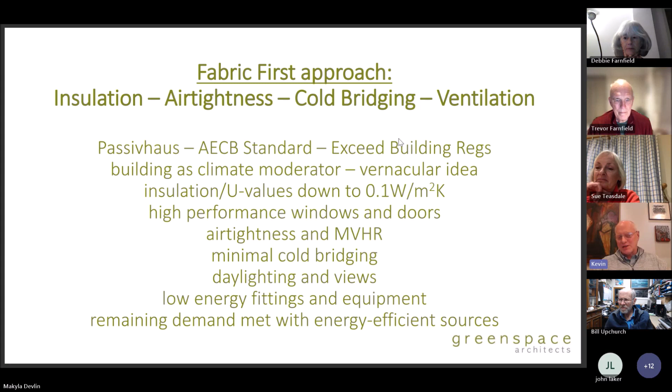Next, please. So with new build, it is a bit easier. You can use these on extensions as well, but if you are thinking about a new home, this goes quite a long way beyond the building regs, but there are basically 2 choices: timber-based systems or concrete-based systems.

The timber systems include what are called SIPS panels, which are structural insulated panels, which are 2 sheets of board with insulation between. The passive frame is taking 2 bits of timber and filling the gap, usually with cellulose fibre, which is like ripped up newspapers, if you like, a very, very low carbon, very high performance solution, or what are called closed panel timber frames. So you may have seen timber frames made out of 4x2, 5x2 sections. These are actually made in a factory and come to site as whole wall panels. You get a much higher standard by building off site.

On the concrete side, it's called insulated concrete formwork. If you watch Grand Designs, you may have seen polystyrene blocks that they fill with concrete and sometimes they burst. So products like Nudura or Jack-On. Then there are the mineralized wood fibre ones. You may have heard of Durisol, for instance, which is a bit like shredded wheat, if you like, strips of timber covered in concrete and formed into blocks, which again you pour concrete inside, and there is a panel-based version of that.

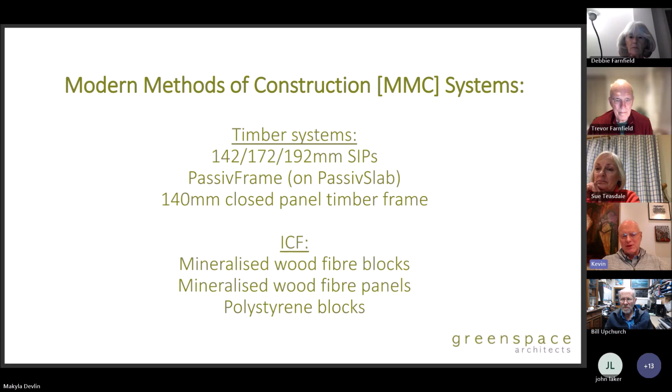Next, please. And with those, there is no real look to eco design. If you wanted it to look like a Georgian cottage, you could do that. If you wanted it to look like a farm, you could do that. If you want it to look like the grand design you wished for, it could look like that. Some people want to be demonstrably green, so people know they have an eco house, but one of the most eco houses we've got does look like a Georgian farmhouse. This is the one that has no space heating demand, although he has put this small LPG boiler in.

A company called MBC, based in Gloucester, produced this twin frame, which has already got passive house standard. Now, passive house is one of the standards, again, you may have heard of. There is a retrofit version called EnerPHit, and this really takes everything, airtightness and insulation, as far as you need to in order to have that warm jacket. And the idea of the warm jacket actually keeps the heat out in the summer as well as keeping the heat in during the winter. Works both ways.

And this one, in the top centre with the pink there, actually has a polystyrene ground floor slab as well. The pink or purple part is higher density polystyrene, which means there's no cold bridge to the ground even, and then a minimum amount of concrete. The hatched area in the centre is a small amount of concrete. Concrete, unfortunately, is still the only thing that really does what it does. You might hear of hempcrete and other concrete substitutes, but they're still a little way off being mainstream yet, while they are trying to decarbonise it. So with new build, relatively easy.

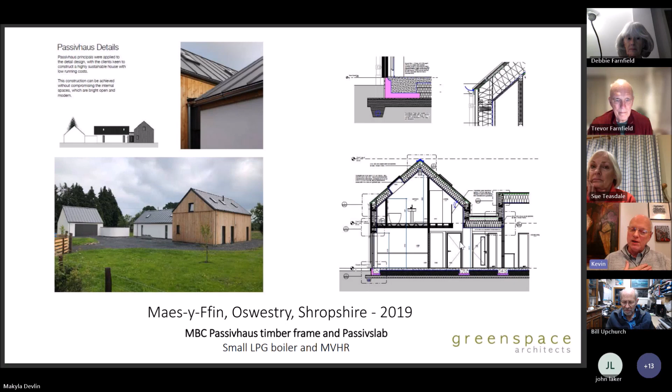Next, please, Michaela. This is an ICF house, again, completely different shape, completely different look. This is made up of mineralized wood fiber panels, but it's got a huge integrated solar array, big battery, and an air source heat pump. And it could look like what. So part of it has got timber frame in it, brickwork and slated roofs. The rest has got a sort of standing seam metal, which is reflective of a barn across the river, the other side, that it's kind of inspired by, and the materials kind of update that.

But as you can see, the as-built EPC, when it was completed a few months ago, has actually gone beyond. EPCs go from 0 to 100. Anything above that means you're a net exporter of energy. So not only are they energy efficient, they're actually positive contributions back to the grid, meaning it creates more energy. So again, new build, relatively easy. It's not rocket science. This is the thing. So next, please.

This is just a section through the level of detail you have to go to, and you've got to have effectively an airtightness champion, because airtightness is about as important as insulation: you stop the draft, you stop the leakage in and out. You can't quite see it on here, but there's a line that runs all the way around the outside, around to the windows and everything. And somebody on site has to make sure that is maintained.

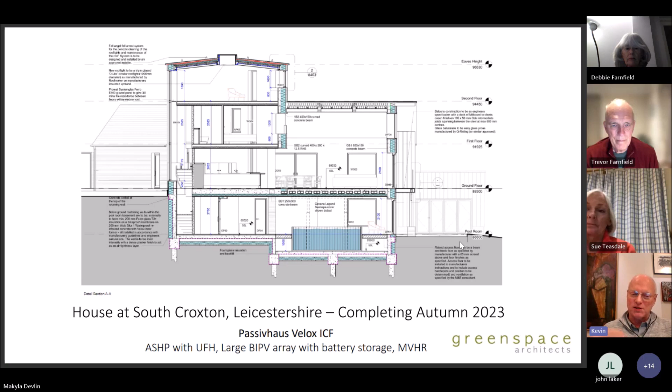So you've got this breathable layer. It's not like living in a plastic bag; moisture can pass through it, so the walls breathe. But you then have to meet that with a mechanical ventilation system, which recovers the heat before it leaves the building. Next, please.

So here, this is a 1956 bungalow that actually backs onto Highgate Cemetery. One of the Monty Python cast lived next door. Very interesting. In fact, the lady's father designed it, and she grew up there. And we've done effectively the basic thing. We're trying to get that warm jacket over it. So at a basic level, we've got really good windows, beautifully fitted and airtight.

When it was first done, they were still getting drafts, and we had a thermal imaging company come in who also look at airtightness, and they did us a report. We could see exactly where the problems were, and they basically hadn't sealed underneath those full height windows. Made a huge difference to it.

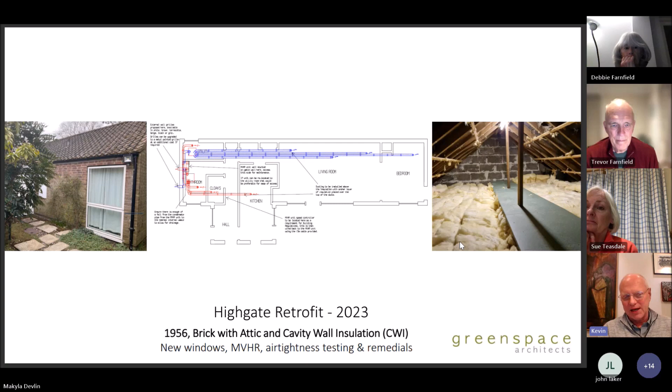That's not so available now, but we put 4 inches, 100 mil, of internal wall insulation, about 12 inches in the floor and 18 inches in the attics. And we've just had the EPC done. It had an EPC of 1 when we took it over. It's actually got a low B at the moment, which is quite something for a listed building.

And we sized everything for a heat pump, but at the time it was cheaper to put a gas boiler, or in fact two gas boilers in, with underfloor heating and a few radiators. But the mechanical ventilation, again, has made a huge difference. Once you get to a certain level of air tightness, you have to do this.

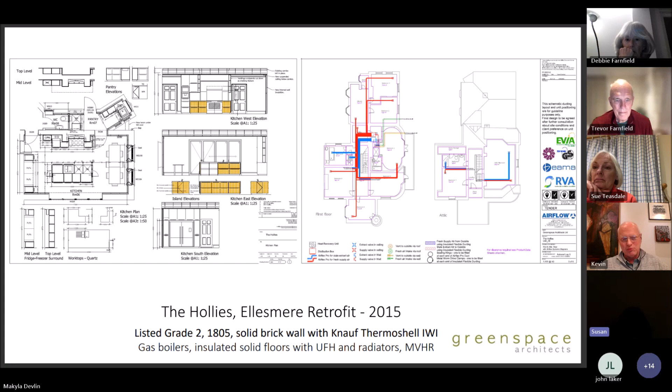Again on the right, a similar thing with the mechanical ventilation system. We actually dropped the ceiling in the hallway to accommodate most of the pipe work, and then the heat exchangers were tucked away in service rooms, and we managed to insert it everywhere into the house. And we think it's the single thing that makes our house cheap to run under a refurbishment. Next, please.

This is slightly different. Again, you might have this as a fairly standard developer house. Small rooms, one room too big, but they had already done quite a lot to it. They had already had a biomass boiler installed, but they had this terribly hot and cold conservatory on the back. Couldn't see the garden, couldn't get to the garden very well, and they had a view straight out the back to a terrace of houses.

And they approached us about remodeling the ground floor, but also turning the attention away to a gap between the neighbours' buildings where they actually look down a field. And we got permission to put a SIPS structure on the back, reconfigured the staircase, and it was just this amazing space now, half in the existing house, half out.

You can see on the eaves line how we've pulled the little extension out the back, put a roof light over that, and at the same time upgraded the fabric of the existing house with internal wall insulation as well, totally transforming their use of the house and the look of it from the back. Next, please. So a simple extension can change how it works.

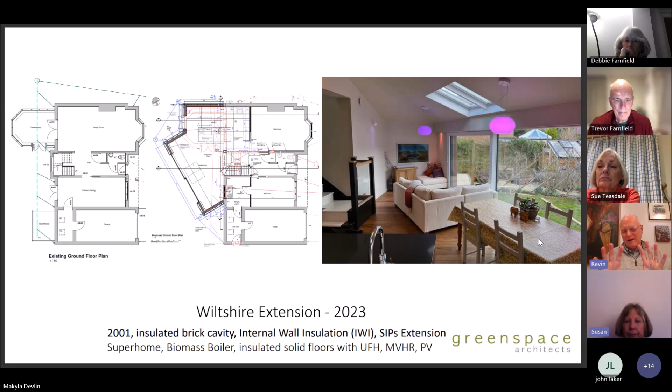And so just by putting a super efficient thing on the back, you can actually change the nature of the end of the house as well. Next, please.

This is again another 1970s, probably late 70s house, fairly bland, very poor performance, very poor air tightness, poorly ventilated. And these people had an idea that they wanted something very modern. So we did a survey of it, using photographs and things. So this is total encapsulation now of an existing house with a little bit of extension here and there, particularly on the back. So again, you can transform your house whilst upgrading the performance.

So here we had external wall insulation, which we then clad with timber and render and a bit of metal to make it look like a modern house and perform like a modern house. Still with a gas boiler. They replaced the existing floors with insulated floors and the ever-present mechanical ventilation. So again, almost anything you've got can become almost anything you want. And obviously, we're way beyond the 20,000 of the first house I showed you for retrofit. Next, please.

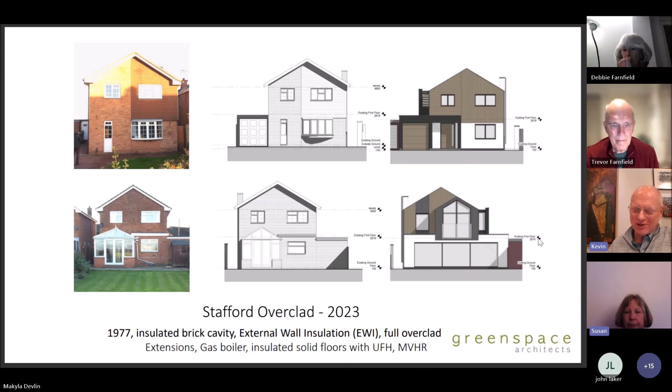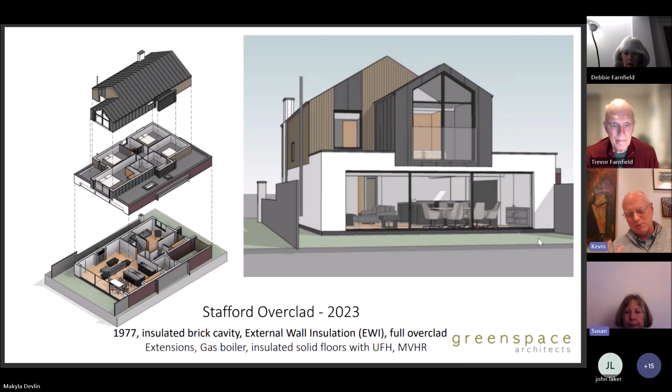So this is the design for it, transforming the way the building worked on the inside at the same time. And whilst you're doing that work, you've got the opportunity to upgrade all the performance of the house as well. Next.

So I had a penchant for orange here for some reason, but again, it's taking that ordinary house and turning it into something they love. And not everyone will love this, but it's for them, not everyone else. And whatever your version of these things is can be achieved.

We like to think today, on the first day, whatever your budget is, you can have anything you want, and then you have to go and try and hold on to that through the whole process, which can be quite long and complex. But in this case, they're absolutely delighted with this result on what was basically just an ordinary house. And again, I don't know what the EPC was like on this one, but that view is actually a view over Cannock Chase in Staffordshire, and that's the view from their bedroom.

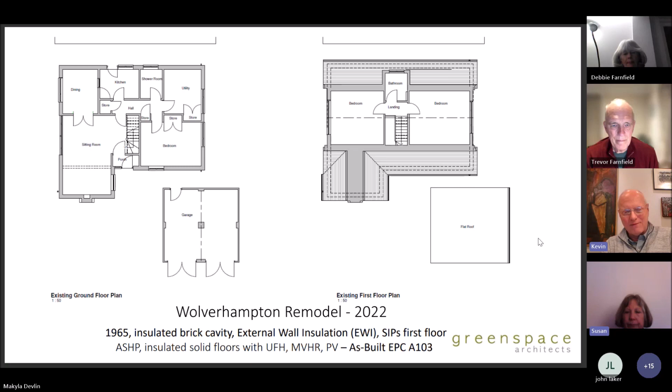And next, nearly there now. This is taking it to a complete extreme now. Instead of just an overclad, we've actually taken a 60s chalet style house in Wolverhampton with a double garage next to it. Very, very poor use of space upstairs within the roof, which starts at first floor level. And next.

And totally cleared out the ground floor, wrapped the whole ground floor in insulation, absorbed the garage into the space, and then taken the roof off and put a whole first floor on there. So you actually get 4 bedrooms and ensuite and all the facilities we want. And in this case, room for 10,000 books and growing to be accommodated in effectively the 4th bedroom and the whole of the landing area. 480 linear meters of bookshelf was required, and this takes it as far as we can. And next, please.

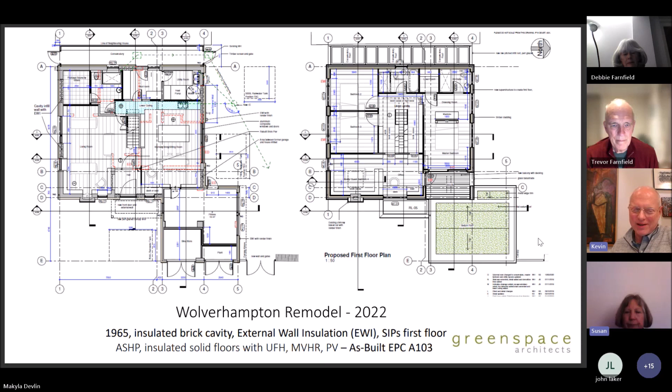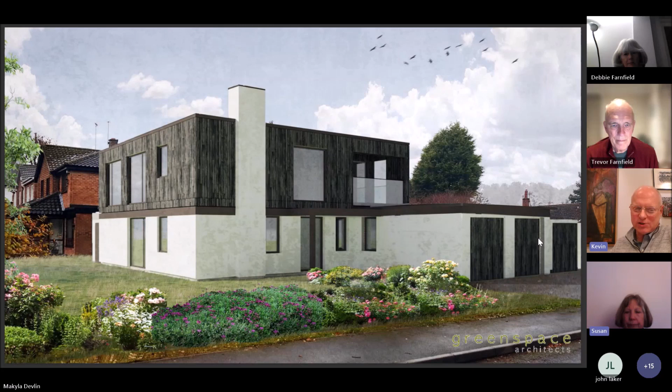And this actually came out again with a positive EPC, by wrapping the ground floor with external wall insulation and render, and the first floor was a SIP structure to the same performance as a new house. And this is what they achieved, next please. So that's it. They reduced the size of the windows for privacy reasons, which I think is a bit of a disappointment, but they're absolutely over the moon with this.

Again, it won't be to everyone's taste, but I say it's for you to do whatever you want with your property or indeed your new build, but all the time it is trying to find strategies to increase the performance through tried and tested methods of insulation, whether that's inside or outside, air tightness, which again stops all those drafts coming through. Ventilation: whilst you can have what's called passive stack ventilation, where you allow air in at low level and take it out at a high level, it's very difficult to recover the heat from that.